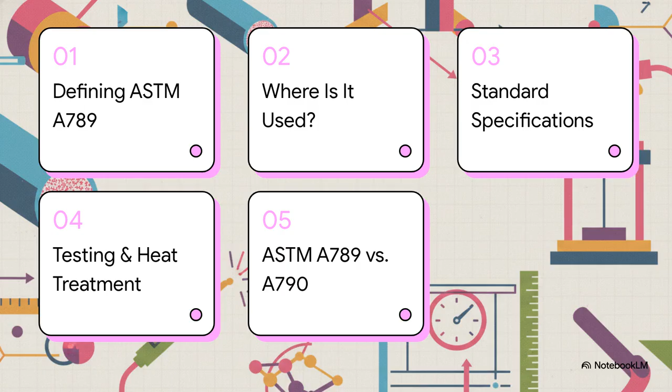Section 1, defining ASTM A789. What is it? Let's establish exactly what we're looking at here. Okay, let's dive in. This official document, ASTM A789, and its metric twin, A789M, outlines the absolutely rigorous requirements for seamless and welded ferritic and austenitic stainless steel tubing.

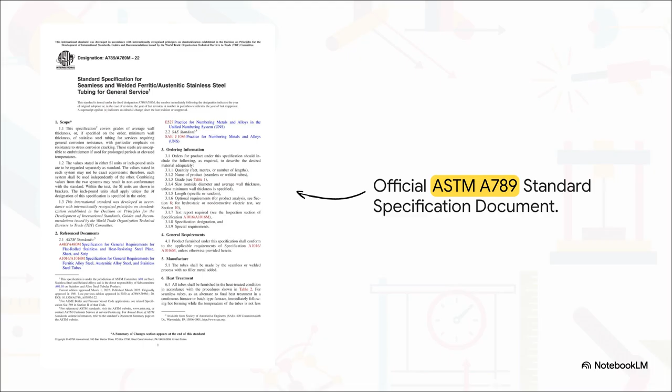Basically, it's the holy grail rulebook for manufacturers. It guarantees the tubing they produce is going to survive general service in some of the most unforgiving environments on Earth without failing. To put it simply, it's a duplex stainless steel tubing standard. Sure, it's engineered for general corrosion resistance, but the real star of the show? That's its intense focus on resisting chloride stress corrosion cracking.

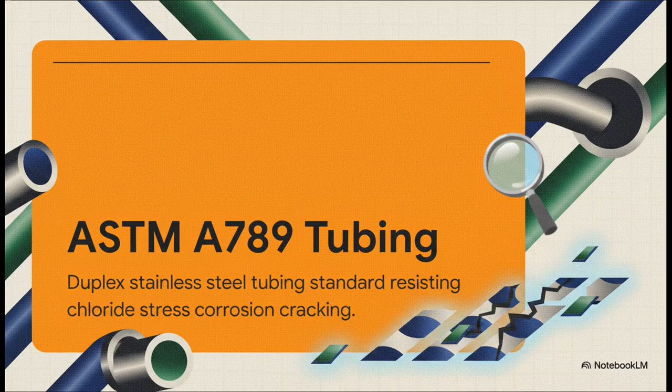Look, if your facility deals with chlorides that cause stress-related cracking, which, let's face it, is an absolute nightmare for maintenance and safety, this is exactly the standard you need to be turning to.

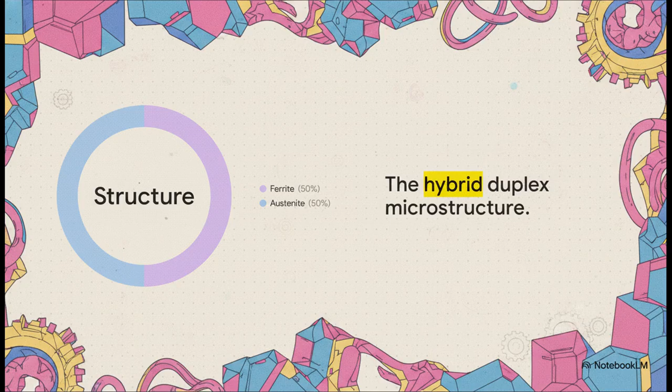Now, what's truly fascinating is why we call it duplex in the first place. It acts like a hybrid, kind of like a metallic best of both worlds. It's roughly 50% ferrite and 50% austenite. By perfectly balancing these two phases, the tube inherits incredible high strength and resistance to stress cracking from the ferrite, while getting the general corrosion resistance and workability from the austenite side. It's a brilliantly engineered combo.

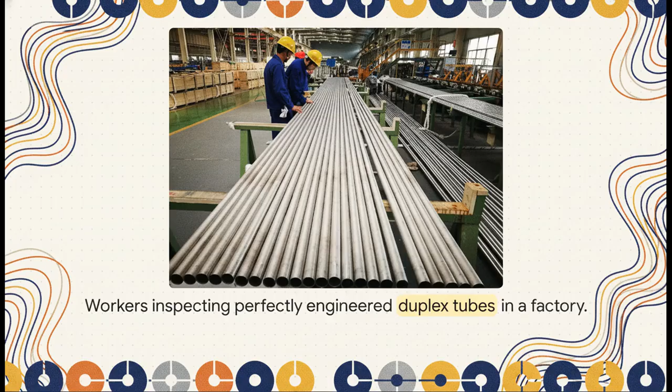Moving on to Section 2. Where is it used? Let's look at the real-world industrial applications of this stuff. You'll find A789 tubing acting as the critical veins for heavy industry all over the globe. Because it laughs in the face of aggressive environments, it's the absolute go-to material for heat exchangers and massive condensers.

You'll also see it heavily utilized in chemical and pharma equipment, gas processing, and the pulp and paper industry. Basically, anywhere you have brackish water, intense bleaching operations, or specialty chemicals, these tubes are the unsung heroes keeping everything running safely.

All right, Section 3, the standard specifications. What are the actual rules and requirements? Let's look at the chemistry. This standard strictly controls the metal's recipe.

Take a super duplex grade like UNS S32750, you might know it as 2507. The chemical makeup requires highly precise levels of chromium, sitting between 24 and 26%, molybdenum at 3 to 5%, and extremely specific doses of nitrogen. They don't just throw these elements into the melting pot and hope for the best.

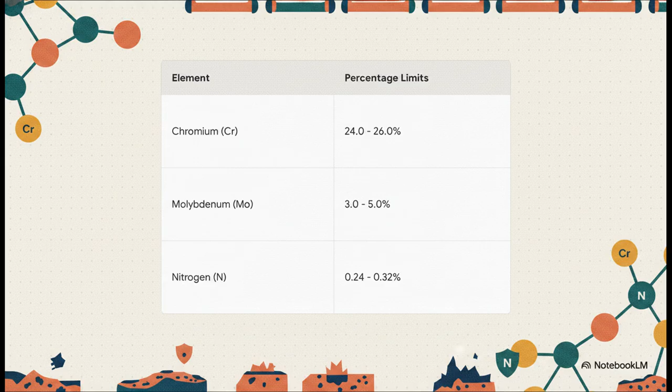They are exactingly balanced to aggressively block pitting and crevice corrosion right at the microscopic level. And mechanically, the tubing has to be incredibly tough. Look at grade S32205, for example. It must hit a staggering minimum yield strength of 70 ksi, that's 485 megapascals, and a tensile strength of 95 ksi. To put that into perspective, these are exceptionally high-strength materials purpose-built to take on immense structural and internal pressures

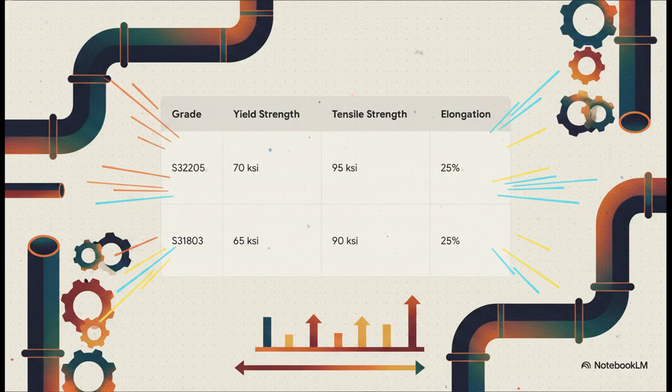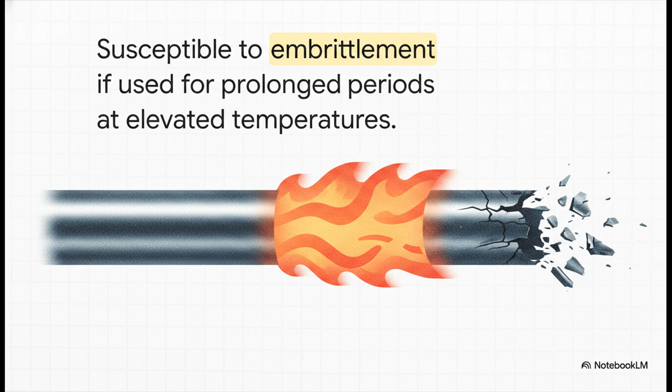without warping or deforming. But wait, there's a catch. The standard issues a really crucial warning here. As tough as this duplex tubing is, it is highly susceptible to embrittlement if you use it for prolonged periods at elevated temperatures. You literally cannot just install this in a high-heat environment, walk away, and forget about it. If it gets too hot for too long, that perfectly balanced 50-50 hybrid microstructure degrades, and the metal becomes dangerously brittle. Temperature control is everything.

Section 4. Testing and heat treatment. Because getting the chemistry right is really only half the battle. The manufacturing process is actually heavily regulated. To guarantee that 50/50 duplex microstructure forms perfectly, the standard mandates a very strict heat treatment process. After the tubing is hot formed, it gets heated in a continuous or batch-type furnace.

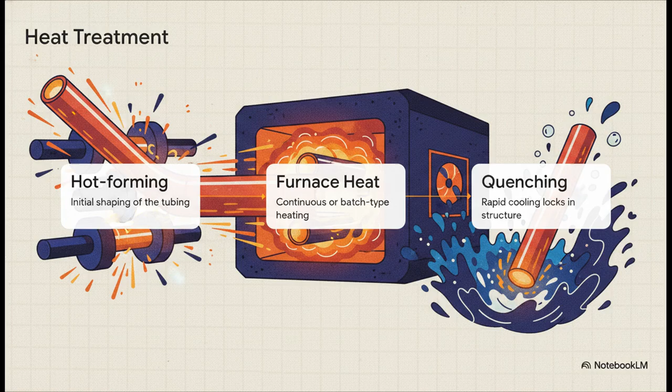But here's the real kicker, the final step. The tubes have to undergo individual water quenching or some other method of rapid cooling. This sudden massive drop in temperature permanently locks in that vital duplex microstructure and all its protective properties. And they don't just box them up and ship them after that. They go through a brutal battery of mandatory tests. We're talking hardness checks, intergranular corrosion testing, positive material identification, the whole shebang.

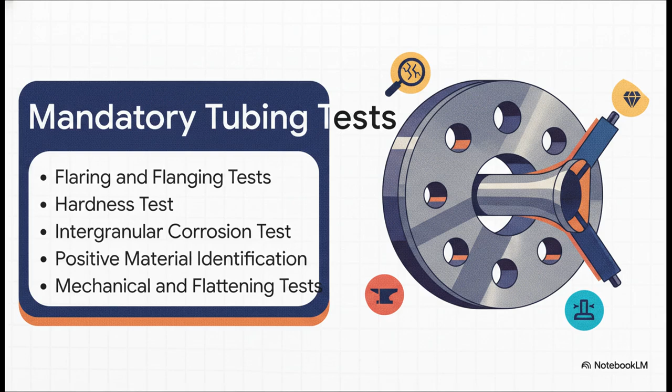But what's absolutely make or break for this tubing are the flaring and flanging tests. Since these are mostly used in heat exchangers, they have to be physically flared and flanged to fit securely into tube sheets. If the metal cracks even a little bit during these tests, boom, it completely fails the standard.

Finally, Section 5. ASTM A789 versus A790. Let's clear up a major point of confusion in the industry. People mix these two up all the time, but they serve completely different purposes. The big takeaway here comes down to dimensional standards. A789, the one we've been deep diving into, is strictly for tubing. It generally features smaller diameters and is measured by exact outer diameter and actual wall thickness. It's precision engineered for delicate things like heat exchangers.

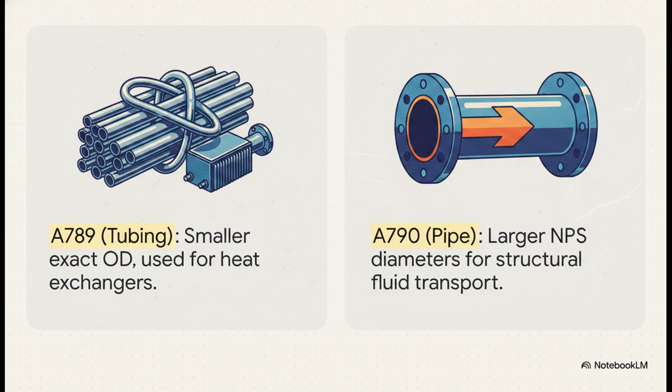A790, on the other hand, is for pipe. Think larger diameters used for heavy structural fluid transport, and it's measured using nominal pipe size and schedule. Because A789 is used in super highly efficient, delicate heat transfer setups, it demands much stricter manufacturing tolerances. Notice how A789 holds a tight wall thickness tolerance of plus or minus 10%. A790 pipe allows for a much looser negative 12.5%.

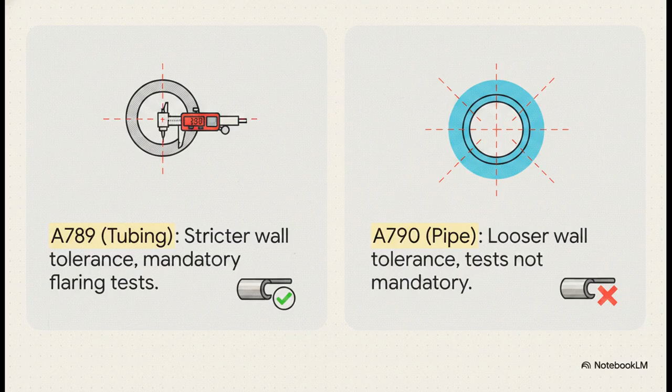And remember those flaring and flanging tests we just talked about? Absolutely mandatory for A789 to guarantee perfect connections. For A790 piping, not mandatory at all. Understanding these nuanced standards is really the key to efficient, safe industrial design. You definitely don't want to use pipe when you need precision tubing, and you absolutely don't want to use standard steel where chloride stress is just waiting to cause a catastrophic failure.

So, with its incredibly strict mechanical tolerances and that fascinating 50/50 duplex hybrid structure, it leaves us with one final thought. How could the ASTM A789 duplex powerhouse transform the safety and efficiency of your next high-stress project?